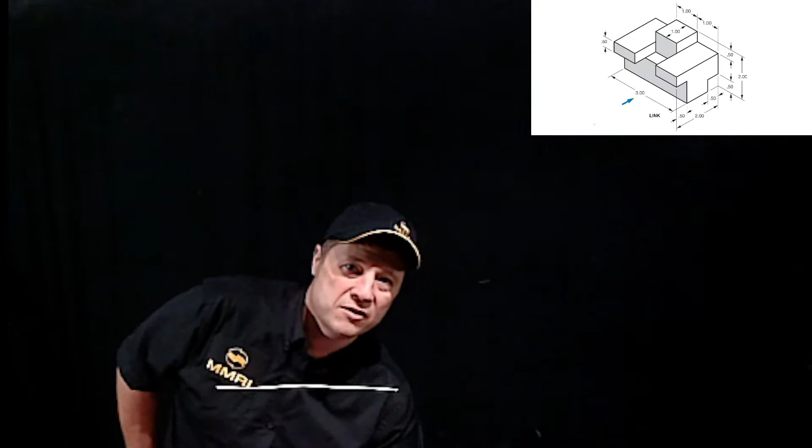Okay, so there's that 2-inch down here. 3-inch was in the front. So I know 2 inches is the overall height, but I want to sketch this line right here. Let me drag this up for you. This is going to be a little challenging, but we'll make it work. I've already sketched the line from here to here. That's my 3-inch. Now I want to sketch this perpendicular line right here.

So I need to look over here and see what information I have. How do I know how tall this is? I don't want to be distracted by other dimensions. Notice it's 2 inches overall height. This step at the top is 0.5, and this opening at the back is 0.5. But I don't have anything here that tells me what the height is.

So I can take this 2-inch, subtract this 0.5, which is from here to here, and then subtract this 0.5, which is the height of this step, and that tells me how much is left. So I know this is 1 inch high because the overall height is 2 inches minus this 0.5 step, minus this 0.5 thickness, leaving 1 inch. So I'll go back.

I'll draw a 1 inch step here. I know that it's 3 inches across, and those two legs, or two arms, maybe we'll call them, this here, this here, and this here. See how they overhang this front section here?

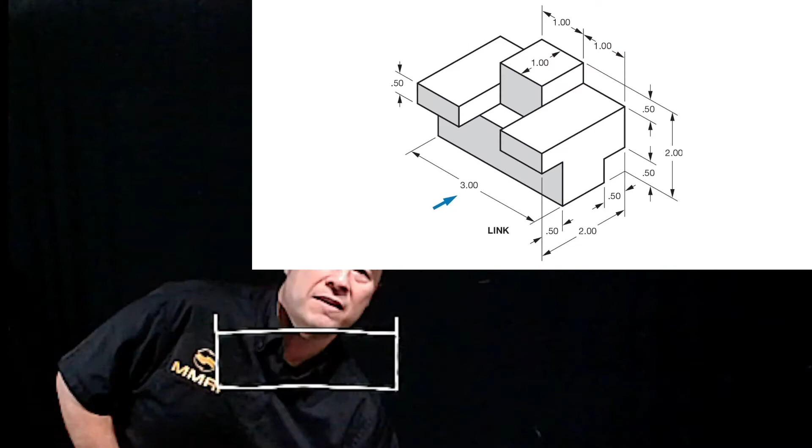So now, by my powers of great deduction, I know that this is 1 inch, and I know that this is also 1 inch. And in the middle there is 1 inch, right? Now I can go back to my object here. I've got this rectangle drawn. I have the fronts of both of these arms drawn. Now I need to draw this gray surface.

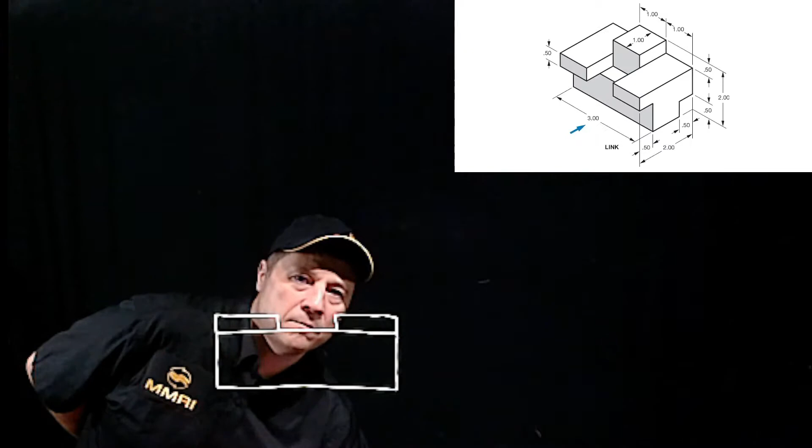Where is it located? Well, notice that it sits, this is my first rectangle. Oh, I'm on the wrong picture, I'm sorry. This is my first rectangle under here. This cube sits on this surface right here of this rectangle. We know it's 1 inch wide. How tall is it? Remember here, 0.5 from the top of this arm to the top of the step. So now we go back, and we're going to draw. It's not gonna, this is why we sketch first.

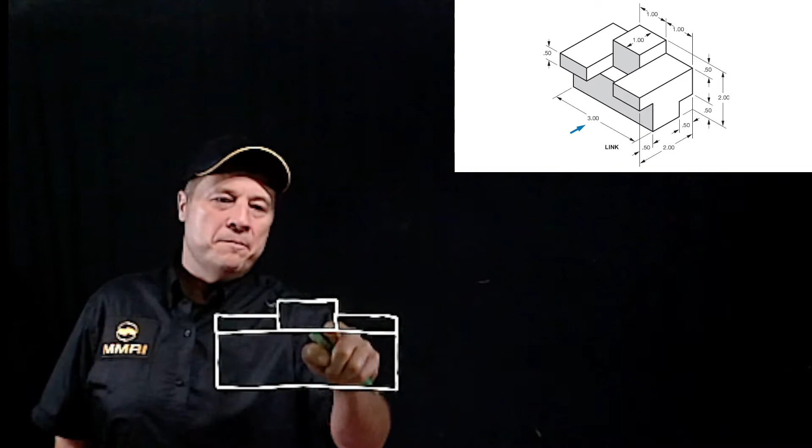Okay, so now I've got the front of my two arms, just like in the drawing. I have my big boss step on the top, and I have my big square here. So is there anything missing in this front view? Look at the gray. I got my big gray rectangle, I got my two gray arms, and I got my gray boss sitting on the top there, or the cube feature sitting on the top.

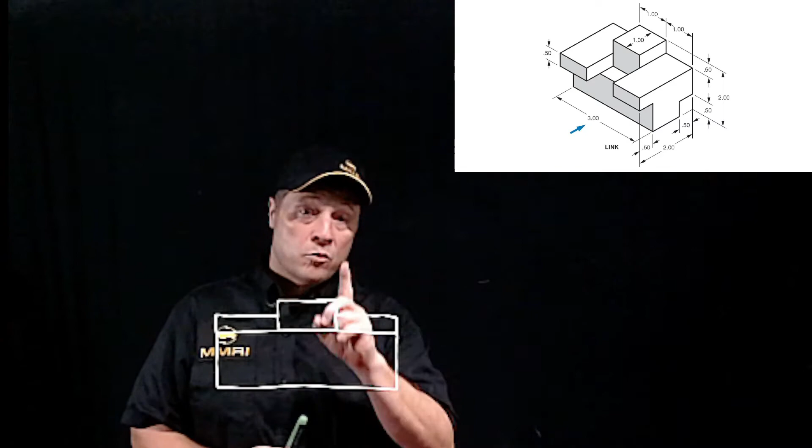We are missing something. Notice if you look at the back, notice this notch right here. And it doesn't tell you how far that notch goes. So if it doesn't tell you, use logic. It goes all the way. Because if it didn't go all the way, it would tell you, right? It would tell you that it stopped 1 inch away or something like that. Notice though, from the bottom of the part up 0.5 is where the back ledge is here.

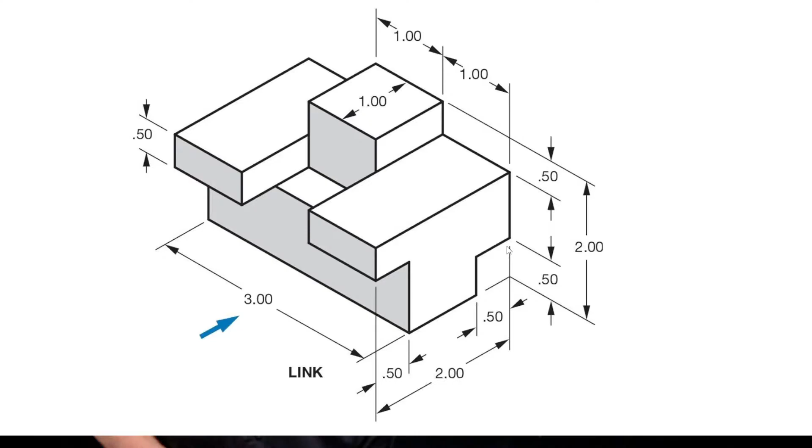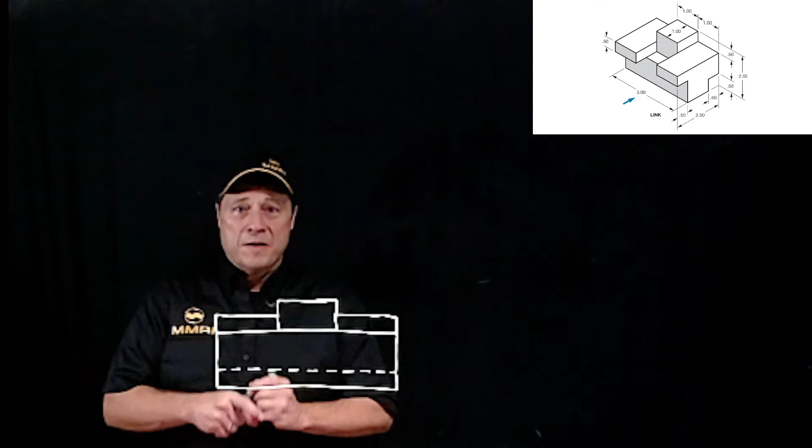So what we need to do on our drawing is go up 0.5 inches and create a hidden line there. That tells me that there's a surface in that location, but I just can't see it in this view. And this will become more clear as we start creating other views, okay? So let's move this up to the top view.

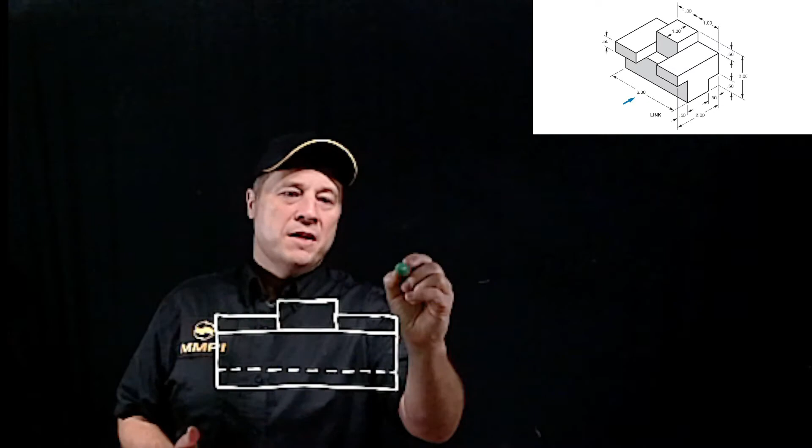Now what I want you to do on your drawing is, wherever the top of the feature is, the highest point on your feature, I want you to go an inch and start your next part or your next view, okay? So we want to go up. We want the top view to be no closer to this than 1 inch, okay?

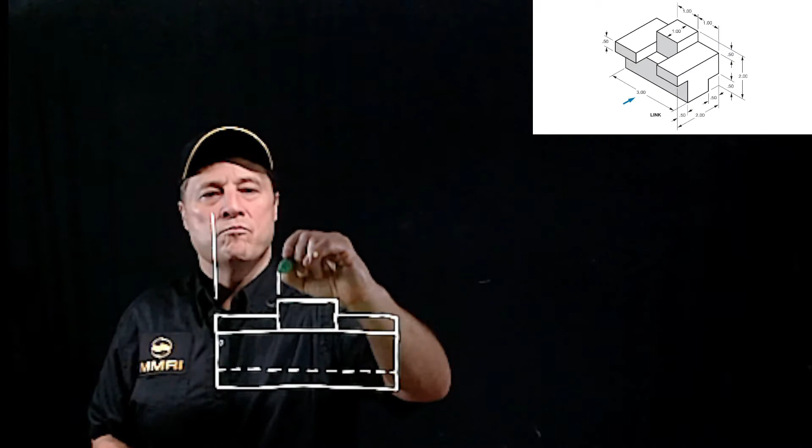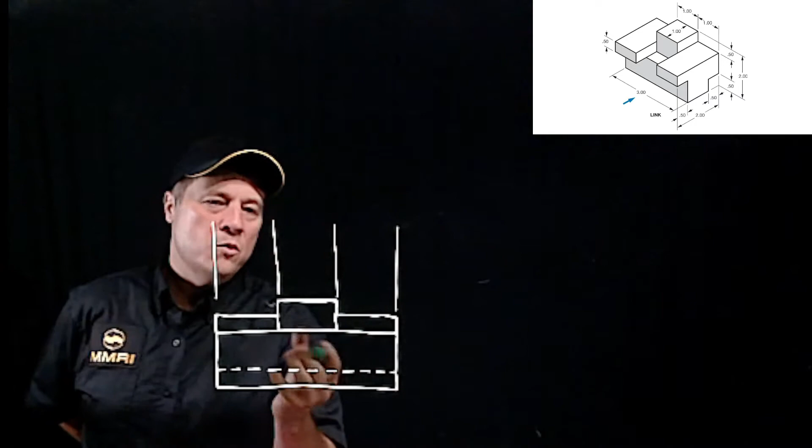So what I like to do is I like to bring construction lines up. Now remember, we are only sketching. So when you're using a piece of graph paper, you can actually go up 10 squares with your construction lines, or maybe 9 squares, so that your construction lines don't run into your part, okay? Or into your new view. So I want to carry this information up. So this tells me where some of this information is going to be.

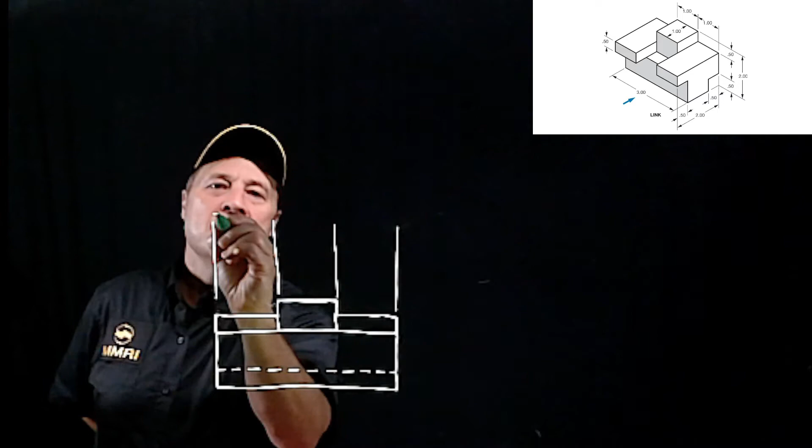So if I look at my drawing, I can see that the arms, if you were to look down on the top, the arms stick out the farthest, right? So I know that the arms are going to go here and here, okay? How far back? This will make sense to you in a second. I've just drawn this line and this line. How far do they extend over the front? Look at this, 0.5, right?

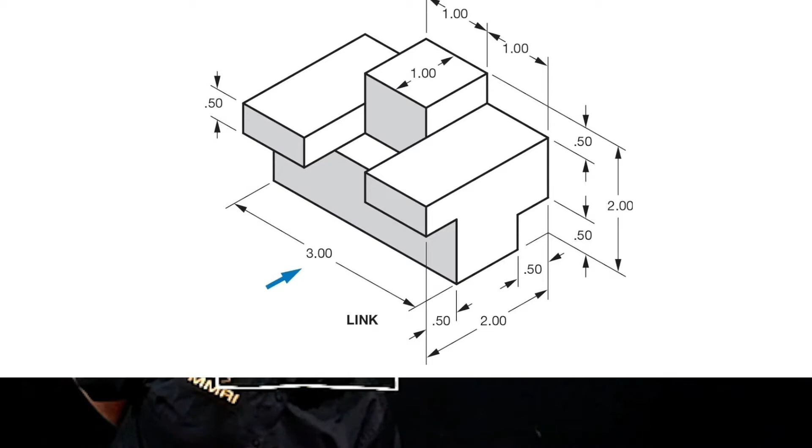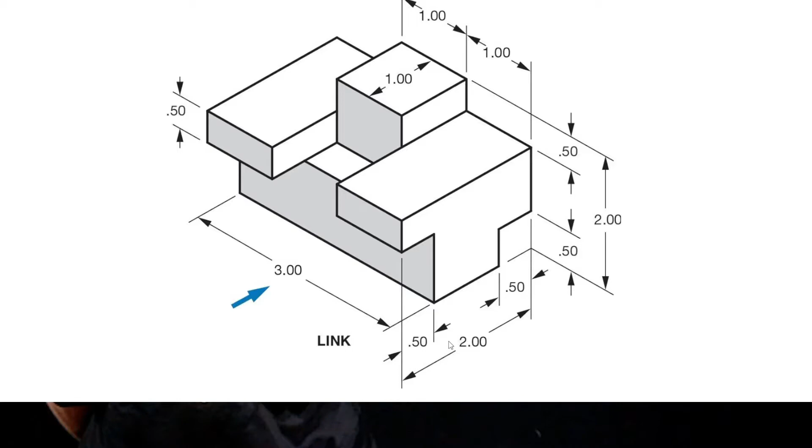So what I'm going to do is I'm going to go back. And maybe what I should also do for you is this. Sorry. Notice this 2-inch dimension, should have showed you this first. So I've drawn this line and this line. I want to draw the line perpendicular to it next. And notice the length is 2 inches right here. So I'm going to draw this 2-inch line, and I'm going to draw this 2-inch line.

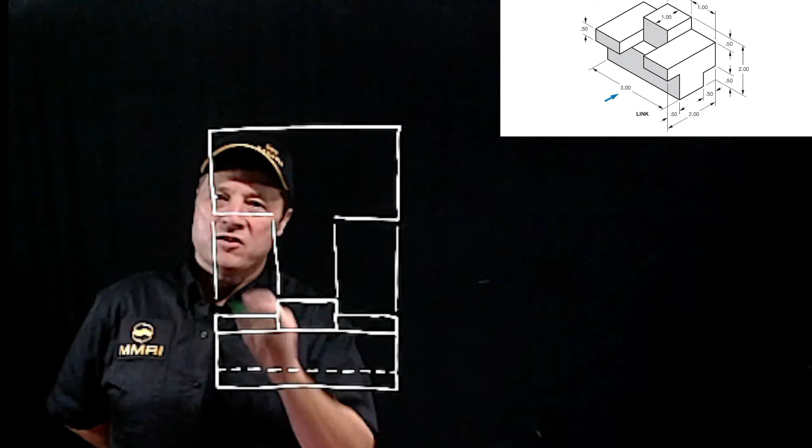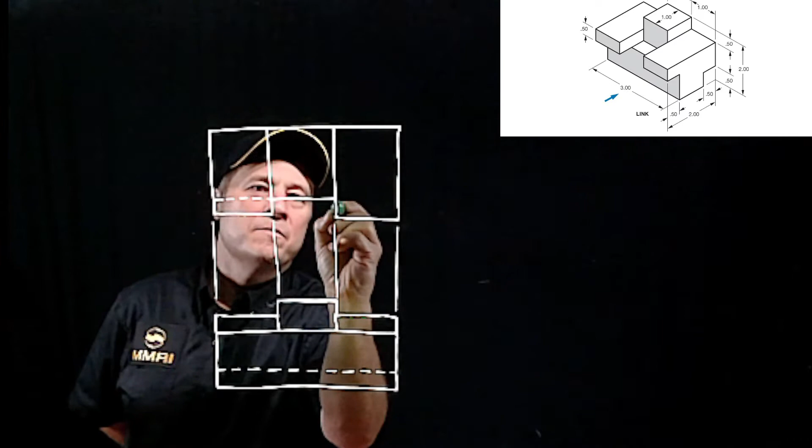If you imagine you're looking down from the top, you see the 2 arms and the boss. From the top, it's just going to look like a straight line, straight across. The only difference is you're going to see this arm is going to do this all the way to the back. This arm is going to do this all the way to the back, right? And then 0.5 from the front, which we just figured out, is that hidden line, but it's a solid line here, and then it continues on as a hidden line here.

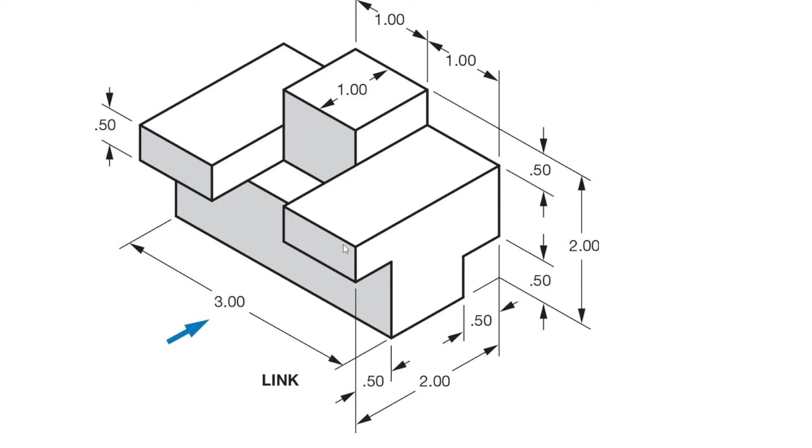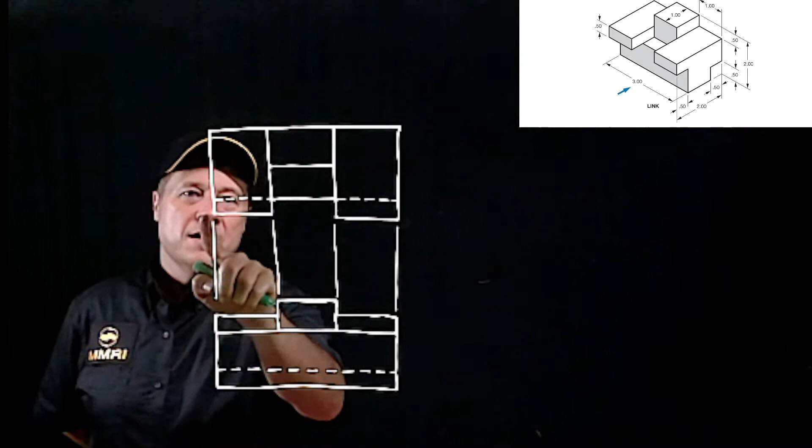Again, look at the view, right? So this line right here continues on underneath. We can't see it. And it continues on underneath here, and we can't see it. So that's this here. Hidden line, solid, hidden line. And now our boss is 1 inch from the back. Sorry, our square. So that's looking down from the top. I can kind of get rid of these construction lines a little bit here, so my view stands out a little nicer.

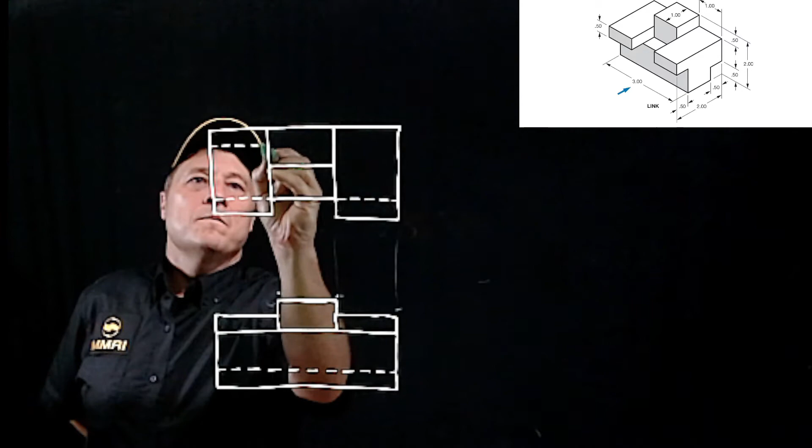So from the front, from the top, and we have one more thing we're missing. Remember this hidden line right here? It's also shown in the top view, right? So we're going to see this where it intersects right here. Oh my gosh, I did it again. Where this surface and this surface intersect at this line, that's the line you're going to see. And it's 0.5 from the back of the part. So we draw that line. Okay. So this is how the part will look looking down from the top.

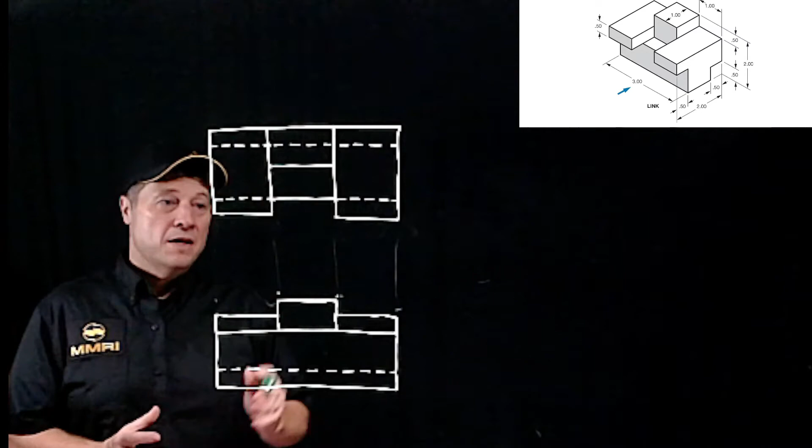So now what we want to do is use a system by means of a 45-degree miter line to create the right side view. You can create the front and the right side view and then use a 45-degree miter line and create the top. Or you can have the front and the top and use the 45-degree miter line and create the right side. So how we do that is we just put a set of construction lines here.

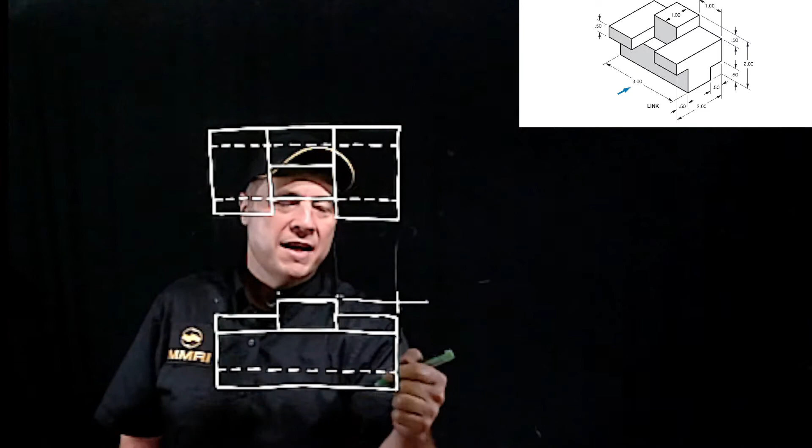Okay. Go from the highest feature in the front view and the feature closest to the right side view and draw a line. Now, sometimes the object actually comes to this corner, so all you've got to do is draw a line from that corner. But when the highest part of your feature isn't at this corner, if this side isn't all the way over, if there was a notch here, you'd have to extend this line, just like we've done. And then you draw a 45-degree miter line.

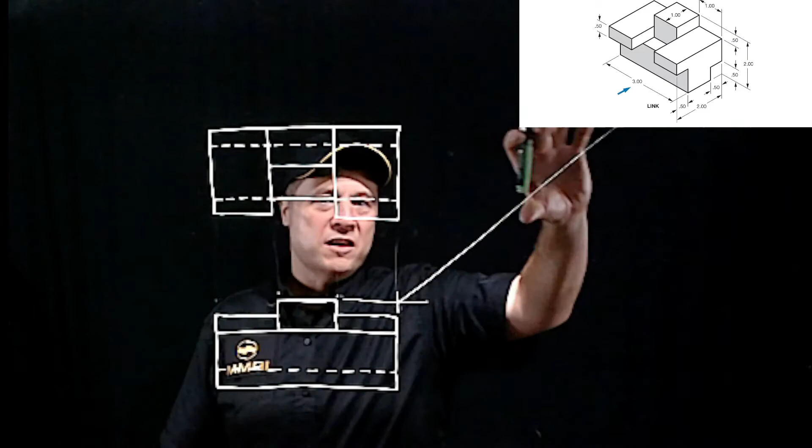Okay, it's got to be 45 degrees because what we want to do is take this object and bring it across, go 90 degrees and come down and create that object here. And how we do that is like this, guys. So let's put this view way up in the corner here for a second.

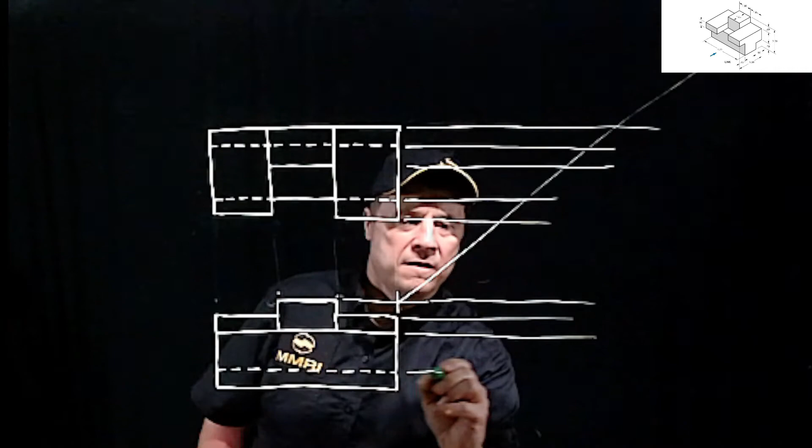So I'm just going to take construction lines, and every single line, whether it's hidden or solid, and keep in mind that I'm freehanding here. So you're going to do this with a ruler. And then this line here. Okay. So I use construction lines to take all of those features and bring them across. And then I take construction lines here, and here, and here, and here, and here. Construction lines, lots and lots of construction lines.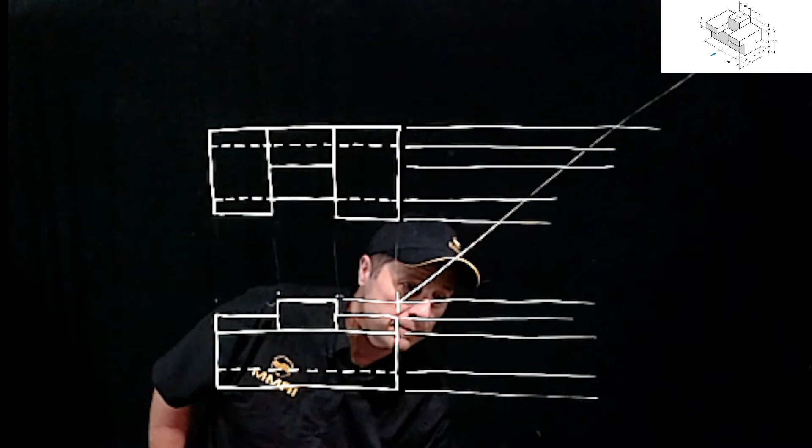Okay, so now I'm going to look at my features, look at my print, and start bringing these lines down. So this first line is the arm, right? And we're going to be looking at the part. Okay, we're now looking at this side here, guys. This and this. So we're looking at this surface right here and this surface right here. Okay, so this is the right side view here.

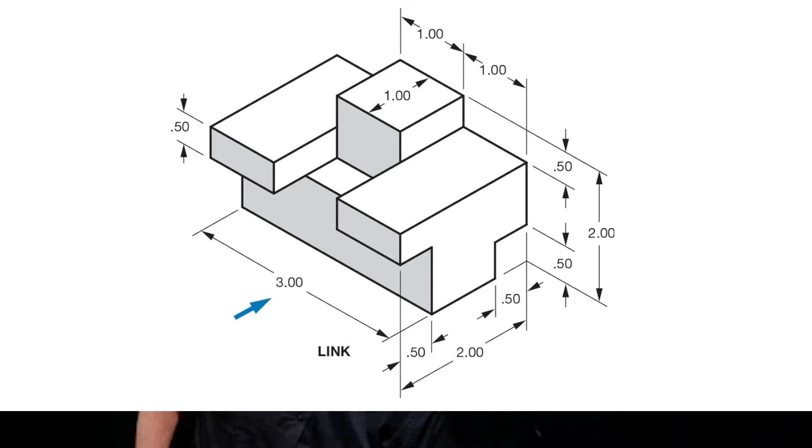So I want to translate this information over onto whatever features I need to. I need to use this and this to create that right side view. So I'm going to bring this down. So notice this is the arm. This is the top of the part. So I don't want to draw the arm there. I want to find the arm. This is the arm in the front view, right?

So I'm going to come down. I'm going to draw my construction line. I'm going to just kind of lightly find it. There it is right there. Okay. And I'm going to draw the front of the arm right there. So now I've got the front of this arm, it comes across, comes down, and I draw it there.

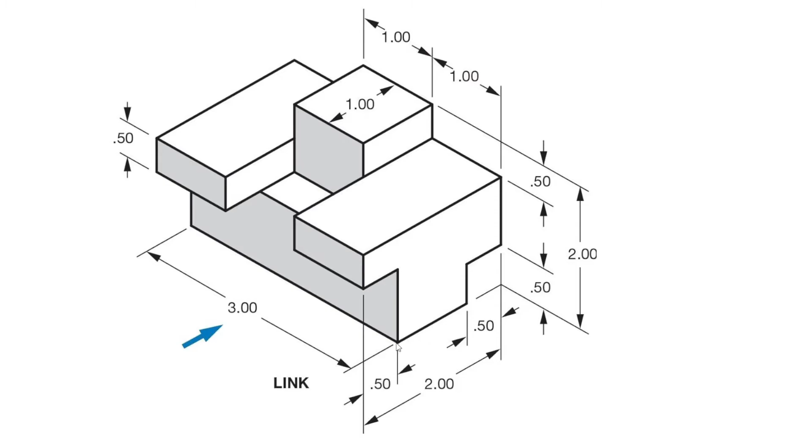Okay. So now what I need to know is where this front face is. That's that second line right there. So it's going to come down. Remember that front face is underneath the arm, right? So if we look again at the print, I've just drawn this line right here. What I want to do is draw this line right here. So I know that this line goes all the way to the bottom.

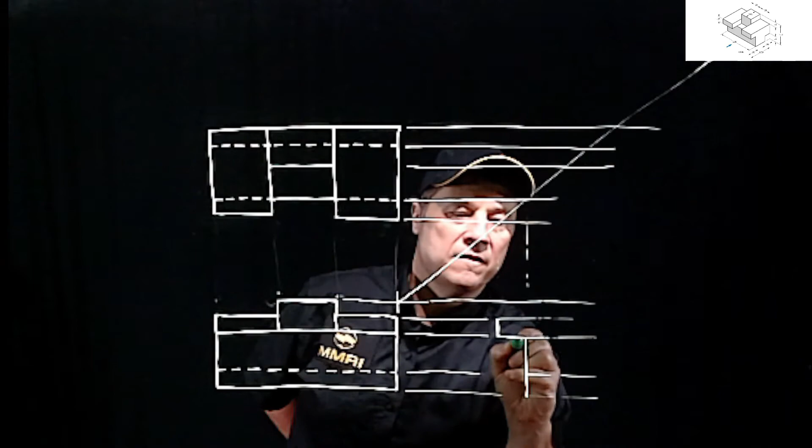So I'm going to go back to where I left off. I want this feature here that goes all the way to the bottom. I'm going to come down, and you would draw your construction lines as you do this, right? And it goes all the way down to the bottom. Okay, so now I'm going to get rid of this, and this, and this. So now I've got so far this line, that line, which was originally a construction line, but now it's an object line because it connects this front face.

Now if I look back at my boss, because that's going to be the front of my boss there. So I come down, okay, there's my boss right there. So I know I can draw my line to my boss. I know that this is the back of my boss here. So I'm going to come down. Okay. So that's the back of my boss.

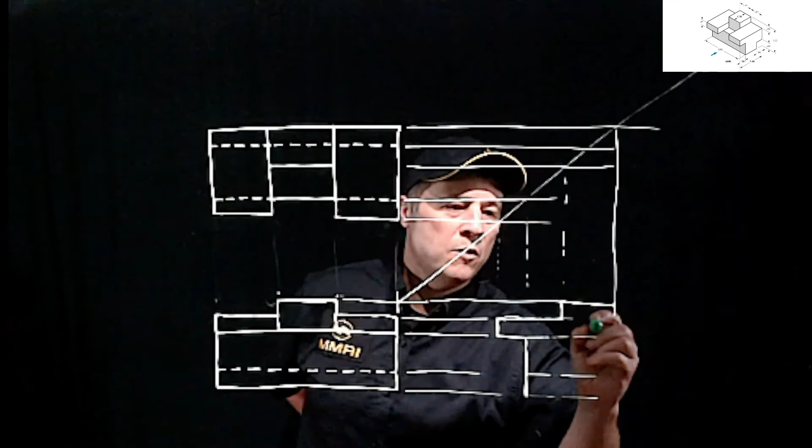And the back of my boss only goes down to, notice in my print, notice here, this boss only goes down 0.5, right? It does go down further on the front, but it only goes down 0.5 right here. So what we're going to do is bring that boss down to this point right here. That's that 0.5. So that means that this arm actually continues all the way to the back, because my boss only comes down to this point.

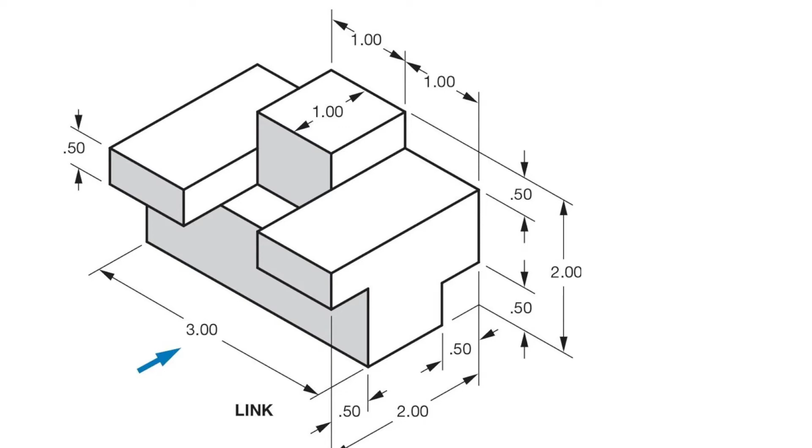We see that arm come all the way across. And to prove that's true, notice this is the front of the arm. Notice it goes all the way back, right? It goes all the way back. And so that is what we've done here, is we've drawn this arm all the way back, okay?

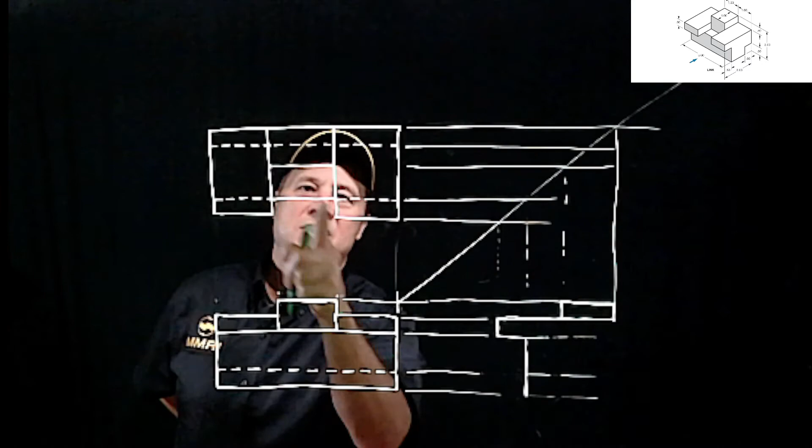So what's the next thing that we've got to do? Well, the next thing we have to do is recognize that these arms, if you notice up here, the arm continues back, right? This line is hidden behind the boss here. So this arm, oh, we don't have to draw that because we drew it on the front.

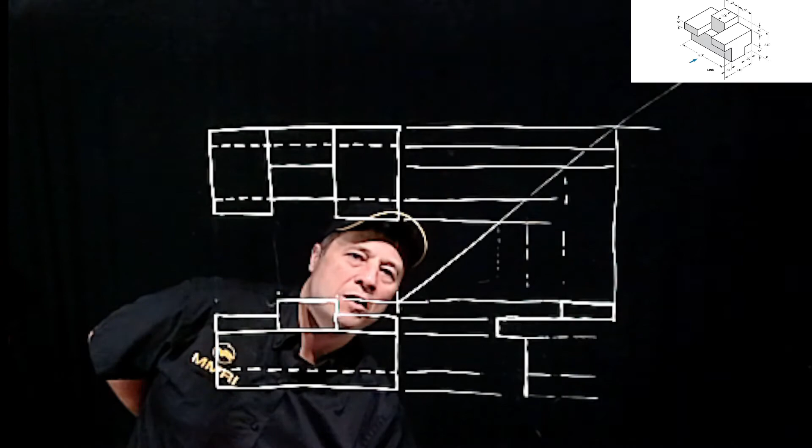Okay, so when a hidden line, sorry, I'm talking without showing you. See this line right here? This rectangle right here, this top surface, you see that as a line in the right side view. This top surface is also in existence, and it will be seen as a line, but it's behind this surface, so it would be shown as a hidden line. But if there's an object line directly in front of a hidden line, you only show the object line, obviously, okay? All right.

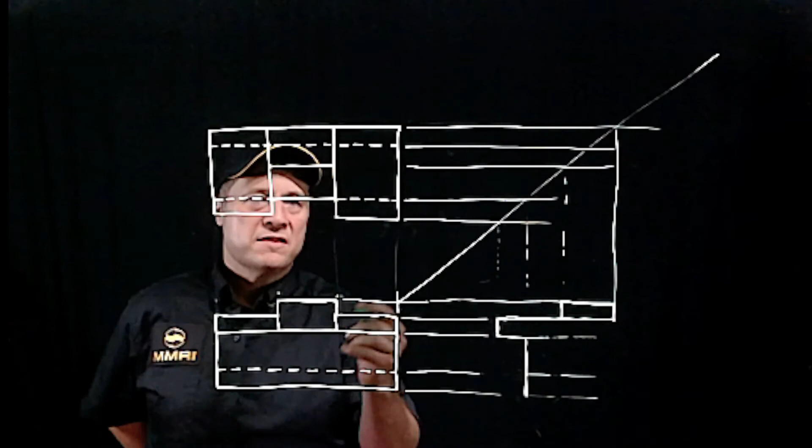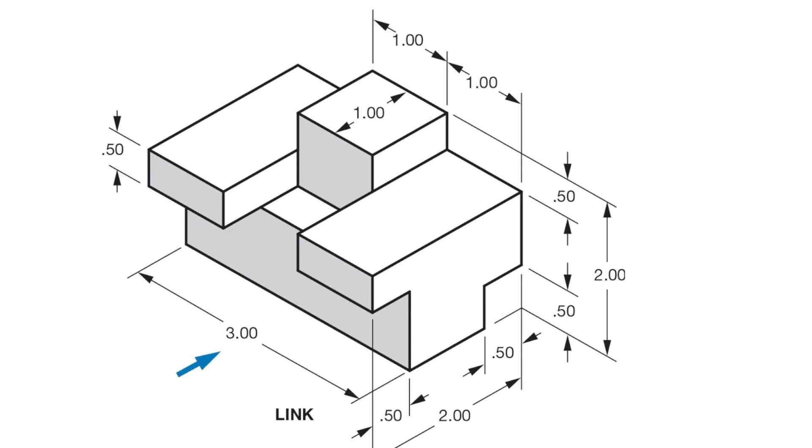So let's bring this view back. It's probably just easier. Okay, so the next thing that I'm going to do here, guys, is on the underside of this, if you look here, I want to draw this piece right here next. I know it's a total of 2 inches deep. I don't know how this is happening, but there we go. Okay, so it's a total of 2 inches deep.

The arm, we already know, overhangs 0.5. We've already drawn that. We need to know now that this line doesn't go all the way back. So 2 inches minus 0.5 minus 0.5 will give us 1 inch of length of line here, right? So that's what we're going to draw next. So where is that surface? That's that hidden line up here, guys. See that hidden line? That's that surface we can't see on the underside.

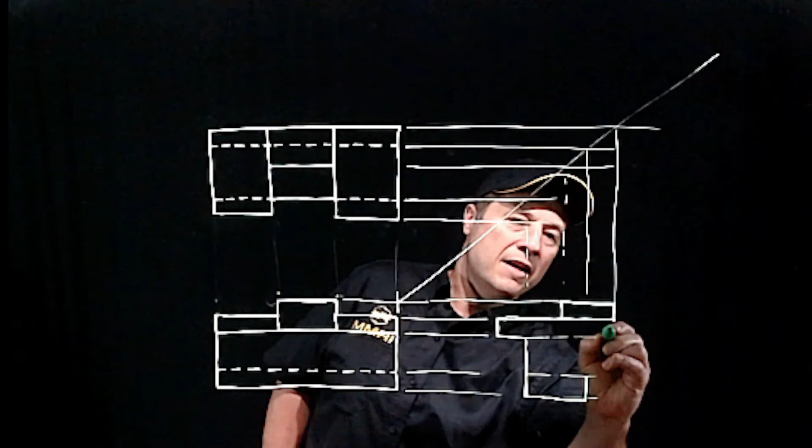So we bring that down, right? Come down, and it's right here. We come down. Now we can close this off. Okay, and now this line, this is the back of the part. We can come down. We come over to this step. It's starting to look familiar, right? We can get rid of this construction line because it's not needed. But there is one more thing that we do need to do.

If we're looking at this surface, you've got to think about, are there any hidden lines? Is there anything that I can't see behind the surface? So where the front of this square comes down, you notice there's a surface here and a surface here. It creates a line right here. So that's a hidden line. And this line right here and the line behind it, they're also hidden lines, right? Because this juts out 0.5.

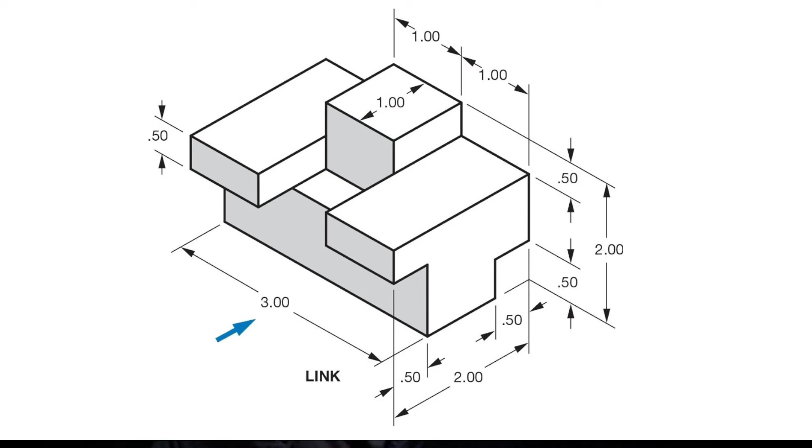Or sorry, you've got to tell me when I'm not doing this. Okay, this juts out 0.5. And this is another 0.5 right here. So I have a 1/2 inch hidden line here, and I have a 1/2 inch high hidden line here. So if I go back to my drawing, I have a hidden line here, and I have a hidden line here. Okay, so now I can go back and get rid of some of these construction lines, right? I can get rid of all this.

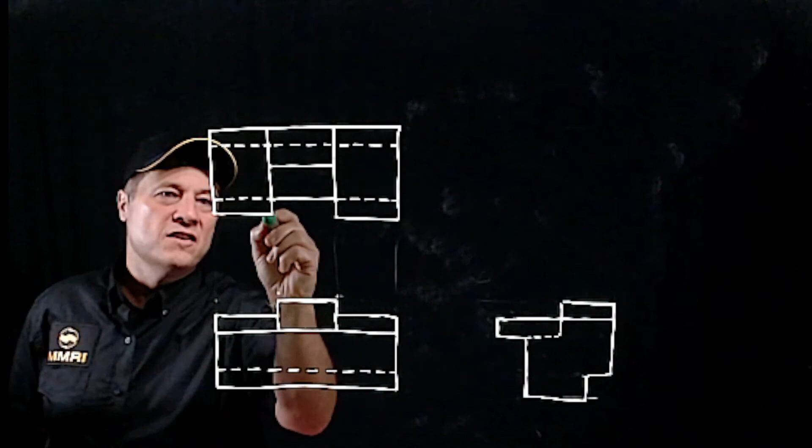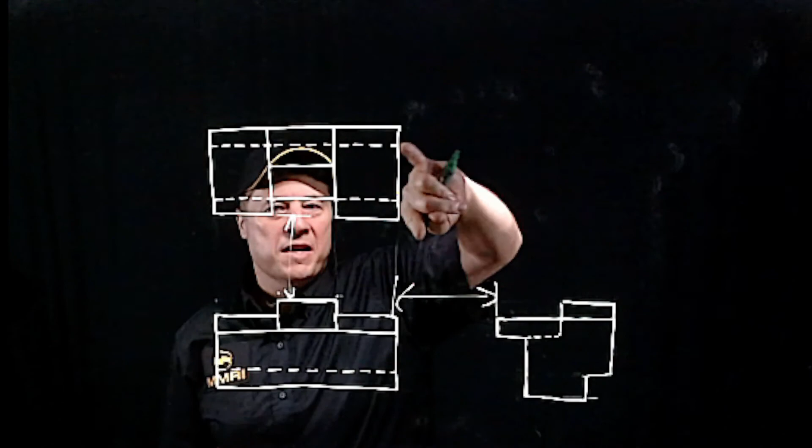As a matter of fact, when you're sketching, you're told not to erase your construction lines. But when you're creating a drawing, you don't want to leave them on, okay? So essentially, in a sketch, not in a final drawing, we end up with this. And when you use the miter line style, remember I said that we're going to leave an inch here on our drawings, but whatever the linear distance is from this surface to this surface, it's exactly the same distance as from here to here, because we used a 45-degree miter line. So it keeps this gap exactly the same. And that's what we want, right? We want that symmetry.